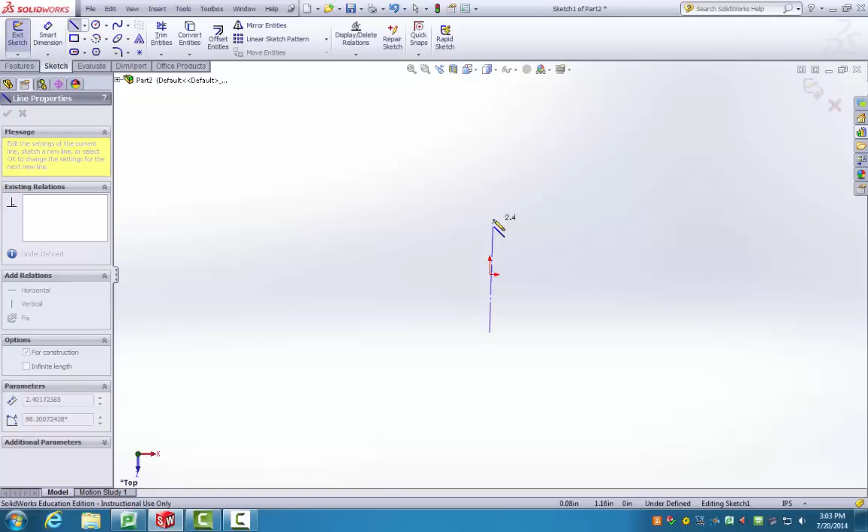To create a construction line, if you remember from chapter 4, drop down, click center line, and we're just going to go like that. Because I don't particularly like these floating blue points, I'm going to click the line and click infinite length, so it goes really big, and that way it's still black with this coincident relation with the origin.

So next we're going to go to Tools, then Sketch Tools, and you can see there's a ton of stuff in here, but we're looking for Dynamic Mirror, and we select this as our mirror line. Next thing we do is basically just make the shape of the base.

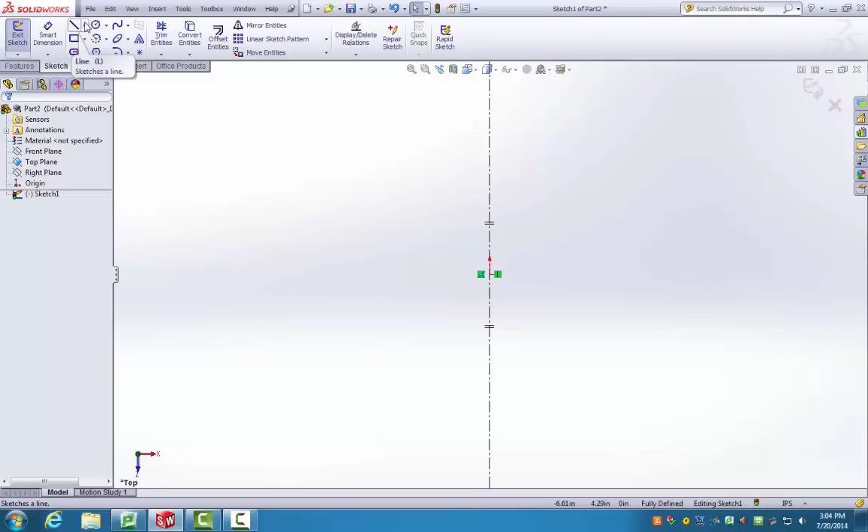I'm going to use my line and draw, and you can see that this dynamic mirror tool, as I go, it's drawing on the other side the exact same thing I'm doing. So next we need a tangent arc, so I'm just going to slide back and pop out, which is that shortcut I showed you before.

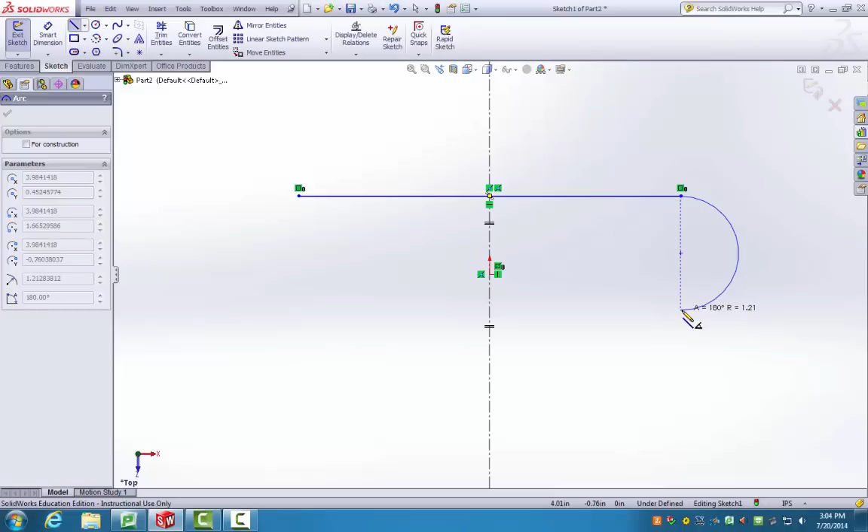Then come right back, go back to the select tool, select a circle, go back to the select tool, and now all we have to do is start dimensioning it.

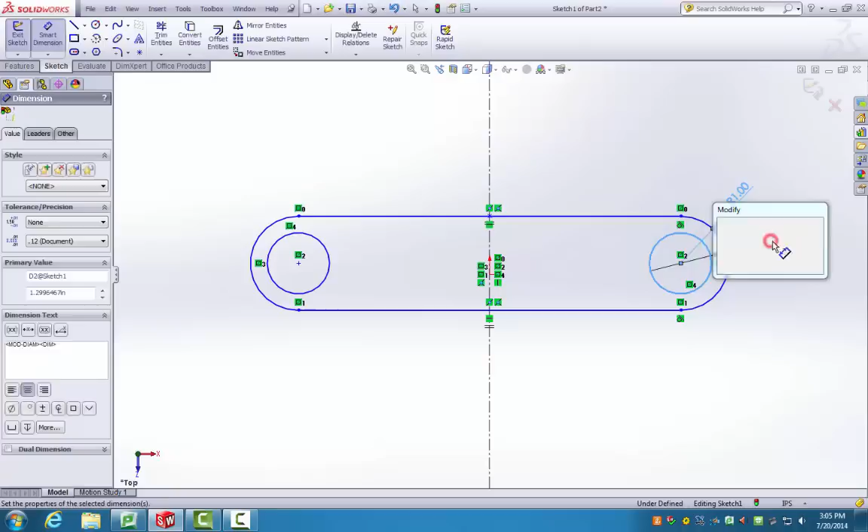So this radius is 1 inch, this diameter is 0.5 inches, the center to center distance between these two circles is 5 inches, and the last thing I'm going to do is, as you can see, the only thing it can do is move vertically. So I'm going to take the center point of this circle and the origin and make them horizontal with each other, and that's a fully defined sketch.

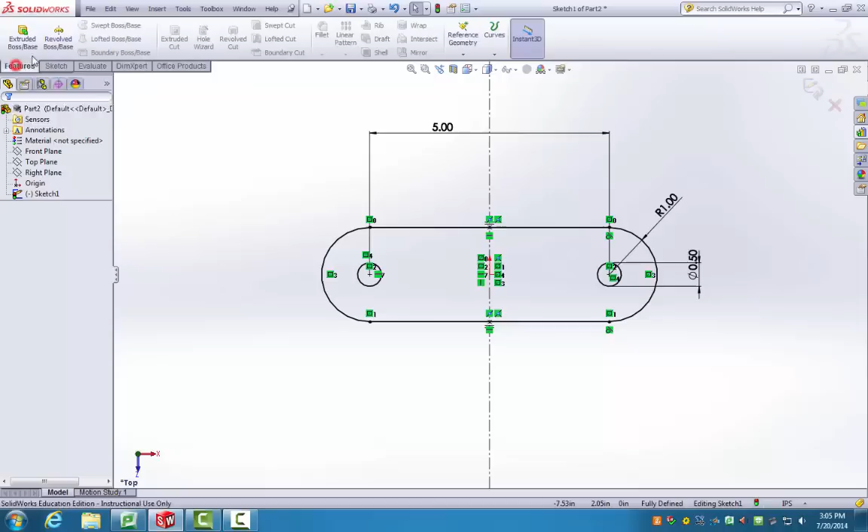Now we can extrude this up 0.5 inches and get to work on the next feature.

The next feature is going to be from the front plane, so I'm going to start a new sketch in the front plane, and it's basically just going to be a circle. Now the book actually does an arc and a line, but I figure it's a little bit quicker just to draw a circle, but maybe that's just my preference.

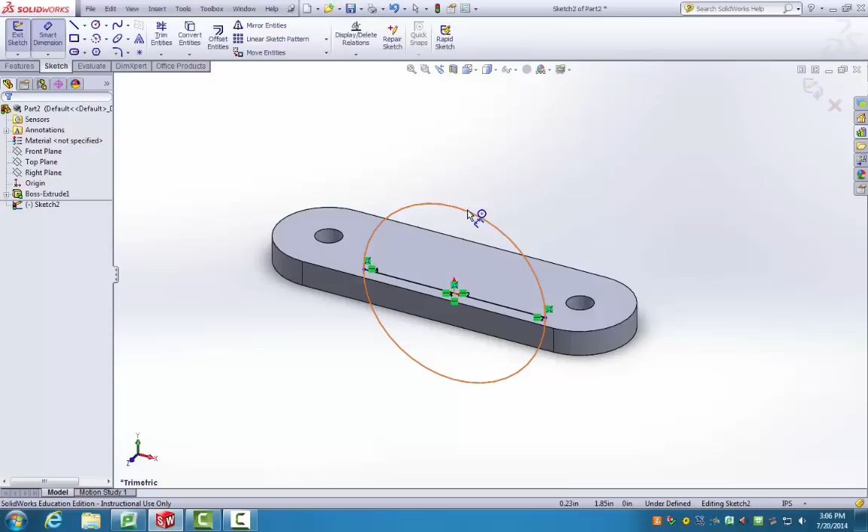For those of you following along, we're at about page 757, so we skipped pretty far ahead pretty quickly. But the radius of this is going to be 1.75 because this is a diameter, so I'm just going to multiply it by 2, times 2. You can see that you can put a little bit of math in there and it'll calculate it for you.

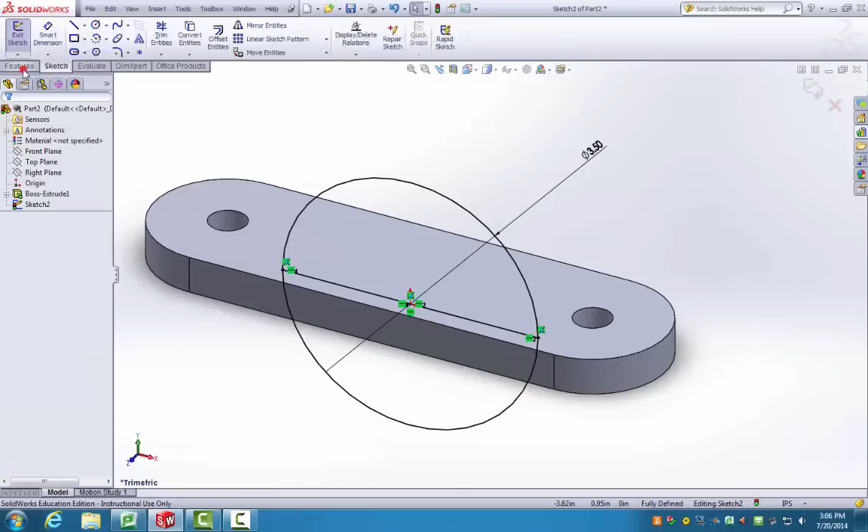Next up, what we're going to do is extrude the top half of that, and we're going to do a mid-plane extrusion, and that's going to be 2.5 inches.

And moving right along, we need to make an extruded cut. Next up, we're going to draw a rectangle and just dimension that 1 inch, 2 inches, and sometimes I want to select the origin right here, but it's not letting me. It's wanting to go to this line.

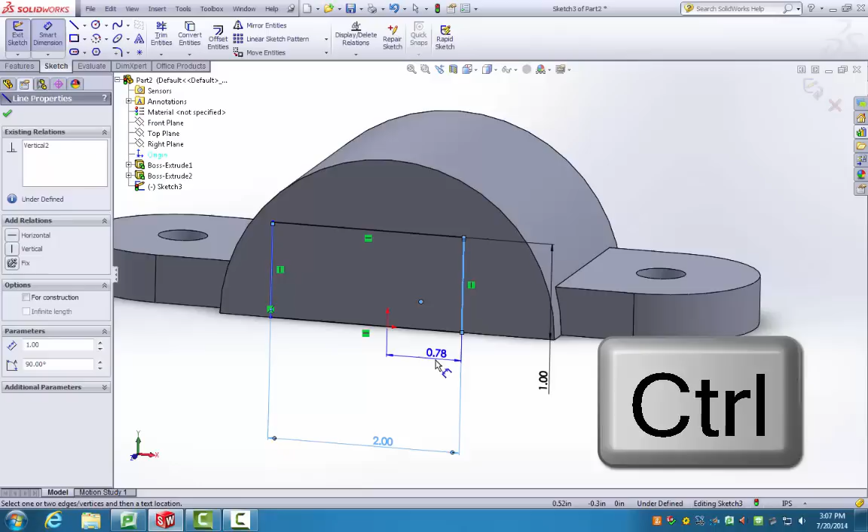So what I'm going to do is click this drop-down feature menu, select the origin in there, hold Control, and then I can select the line. Okay, so that's a little trick. Sometimes if you want to grab something and you can't, but it's a feature on the feature level, you can just open up this fly-out feature menu.

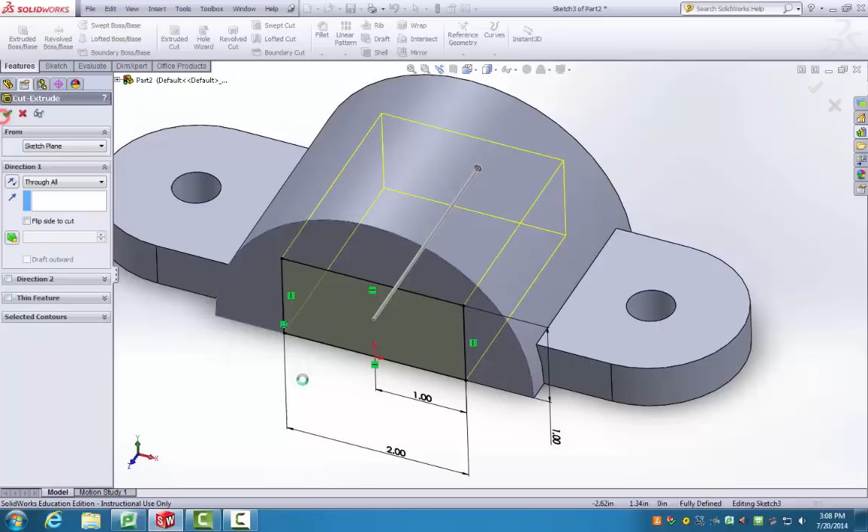All right, that's fully constrained. We're going to extrude cut this, and I'm going to go through all. Now again, the book does things a little bit differently, but follow along. Either strategy will end up with the same part in the end.

Next up we have a hole, so I'm just going to do hole wizard, and we're going to add the position right here, and it's going to be right on the origin. That's why we made that origin centered in the first place.

So it's going to be a straight hole. Go to the drop down, 1/4 inch, through all, and there we go.

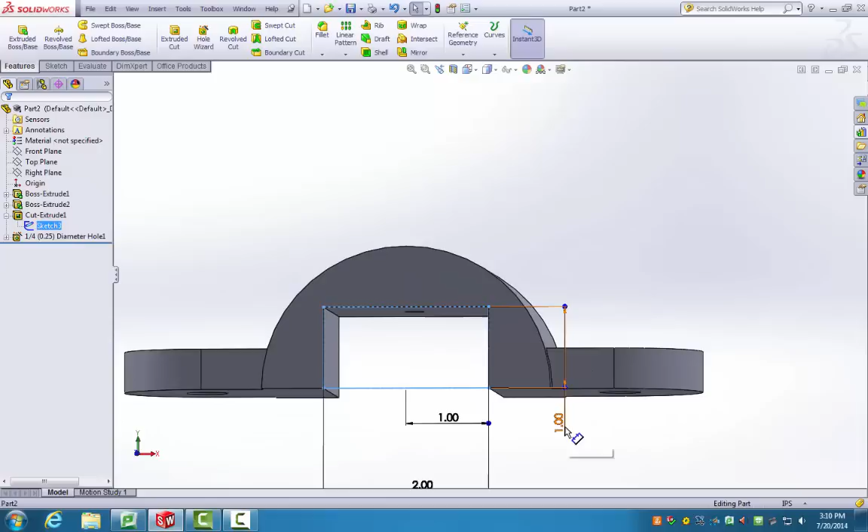Very nice. So the book has you change this to 0.75 and then change it back. We've already done changes like that before, so that's not particularly useful. But then what the book does is it wants to show you that if we have a design change where we need to make, instead of this being a horizontal cut, we need to make it a cylindrical cut.

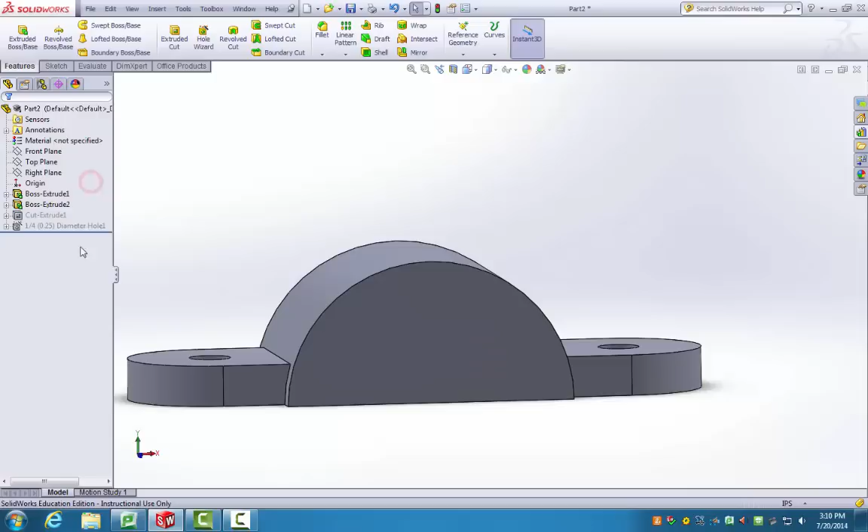So it has us suppress it, and we can see it also suppressed the 1/4 inch diameter hole. Now we don't want that suppressed. So if we unsuppress it, we can see the reason for this is they're linked. This original sketch that the hole was on was off of this plane, off the surface.

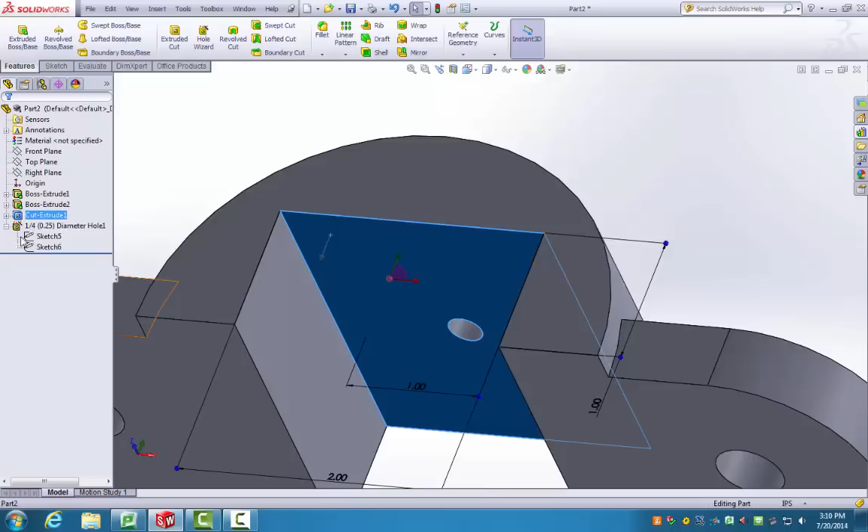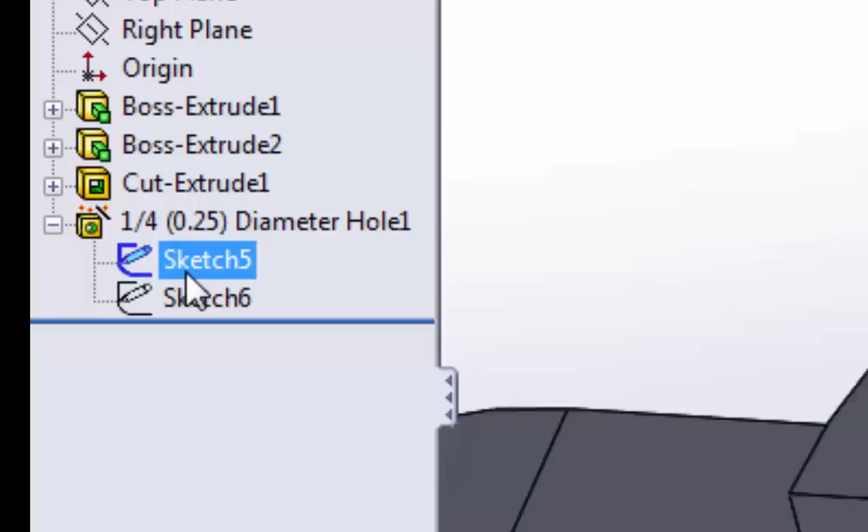So if we didn't cut it, this surface wouldn't exist, and we would have nothing to sketch the hole on. So what we have to do is change the plane we started and sketch the hole position. If we open up the hole from the feature menu, we can see these two sketches: one determines the profile of the hole, and the other is the position. If we look at sketch 5, it's just that one point. So if we right-click sketch 5, we can edit the sketch and add different positions or move it around, or we can edit the sketch plane.

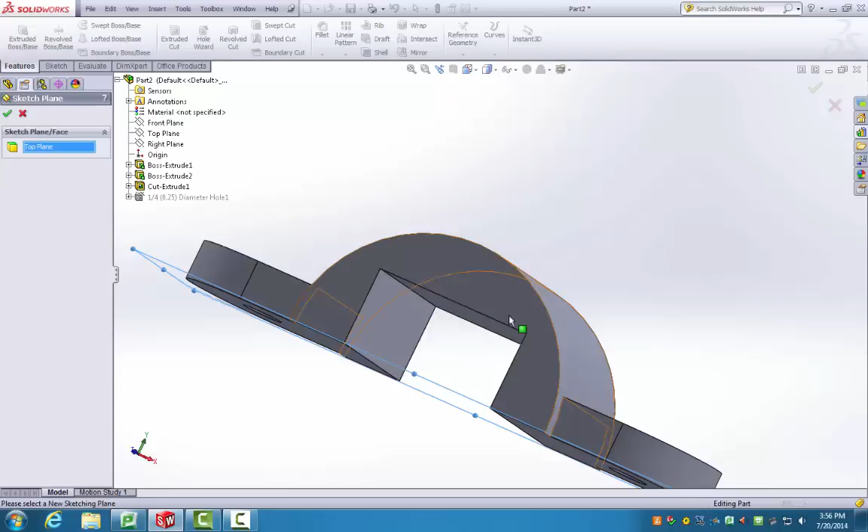So what we're going to do is edit the sketch plane, and as you can see, we selected this face. Rather, now we're going to select the top plane. It's still the same plane, just offset, but because we did a through-all hole anyway, it'll still go through the entire part. So we select OK. The hole doesn't look different, but now if we suppress this, we can very easily see the hole is still there.

So now let's get onto the last part, which is this circular cut. From the front plane, we're going to sketch a circle of diameter 2.5 inches, and we're going to extruded cut that. Now the book has you just do a mid-plane extruded cut, 2.5 or greater.

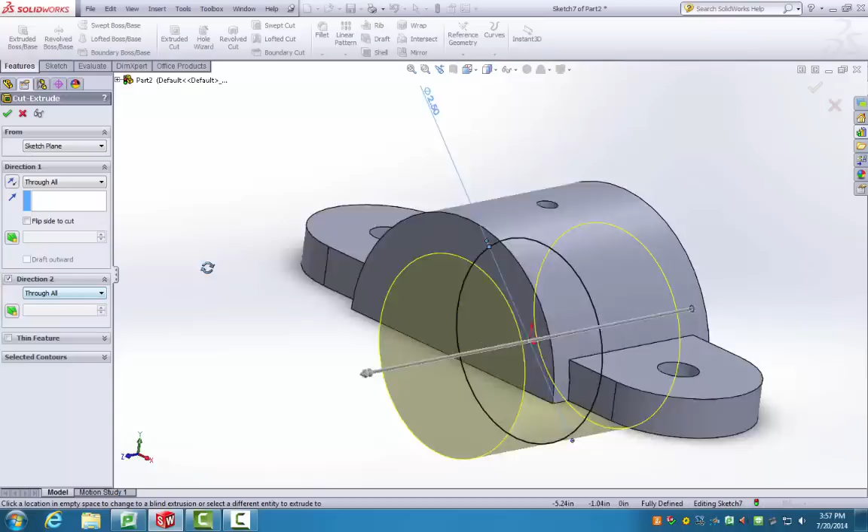That's not really the best way to do it. The best way is actually to do through all. You intend for this cut to go through the entire piece of the part, so you should do through all. Now, you'll notice that because we started in a middle plane, if we select through all, it'll only cut through half of it. That's why if we check this Direction 2 and do through all, we can do through all in both directions.

And that just preserves the design intent of the part just a little bit better. And we'll just leave this suppressed for now in case the design changes again, and we're all set. Now the book has us change the names of the features.

And now that we've done that, I'm going to save this. You want to save this in your Chapter 7 folder, wherever you're saving your parts. I'm just going to save it to the desktop, and I'm going to call this U bracket. So I'm going to hit save.

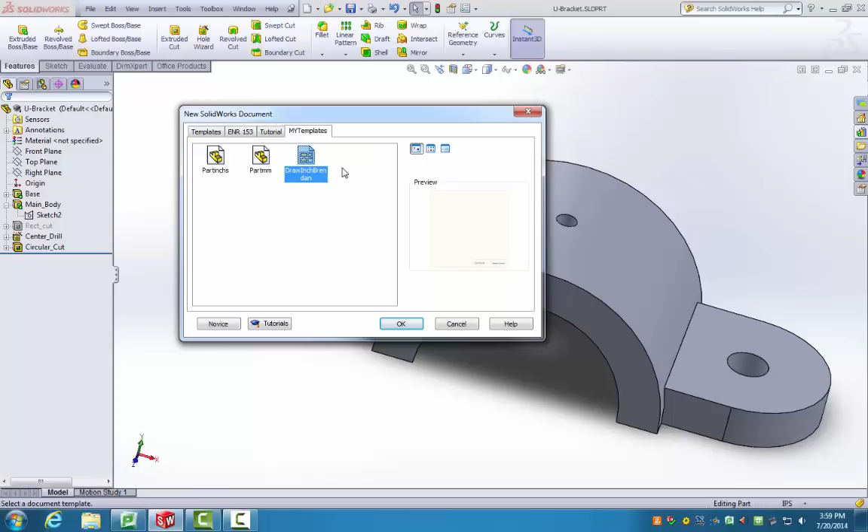And now what we can do is open up a drawing file. Hopefully by this time you've gone through the templates a bit, and you've created your own templates, which will save you time in this next part. So we're going to go to File, New, and as you can see in my templates, I'm just going to select Drawing Inches and hit OK. Having gone through the templates process, it's going to save you a lot of the headache.

For those of you following in the book, we're around page 771. If you've done a template, it's going to save you a lot of the work, basically pages 771 through 775. And we can start pretty much on 776, where we're right away entering the views.

So what we're going to do is X out of model view, which it automatically wants to do. We're going to go to View Layout, and we're going to do Standard 3 View. As you can see, we have the U bracket still open, so it automatically assumes we want to do a drawing of this. If you had closed the U bracket, you can simply go to Browse, find wherever you saved it, and select it from there.

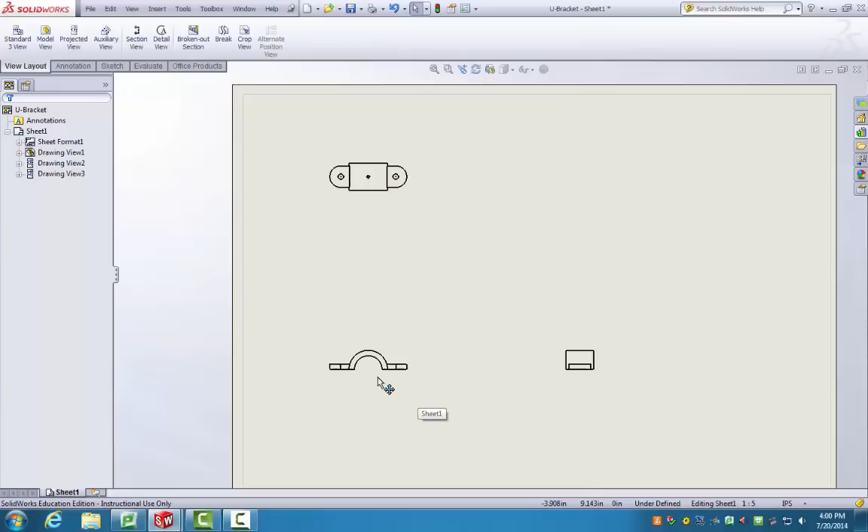And now you can see it imported the drawings. What we can do is select these, and we can change the orientation of the view, change configurations, change the display state so that it includes hidden lines. This is the one we want to select.

Now again, if I choose this front view and modify it, it automatically changes these subsequent views, because that's the nature of an orthographic drawing. They should all be in the same properties.

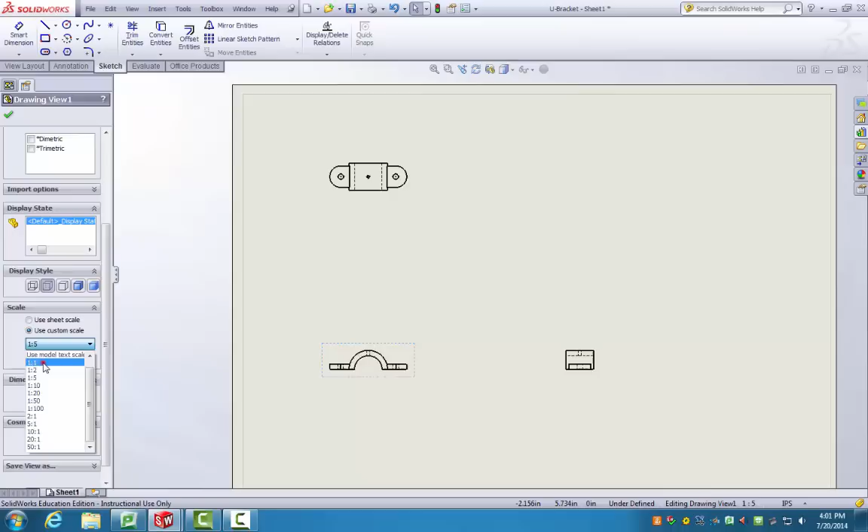We can change the sheet scale and use a custom scale so maybe it's 1:1, well, maybe not 1:1, maybe 1:2, make it a little bit bigger. We can do projected or true dimensions and so on and so forth. And if we hit OK, now we're pretty happy. We can move these and drag them around by just selecting them.

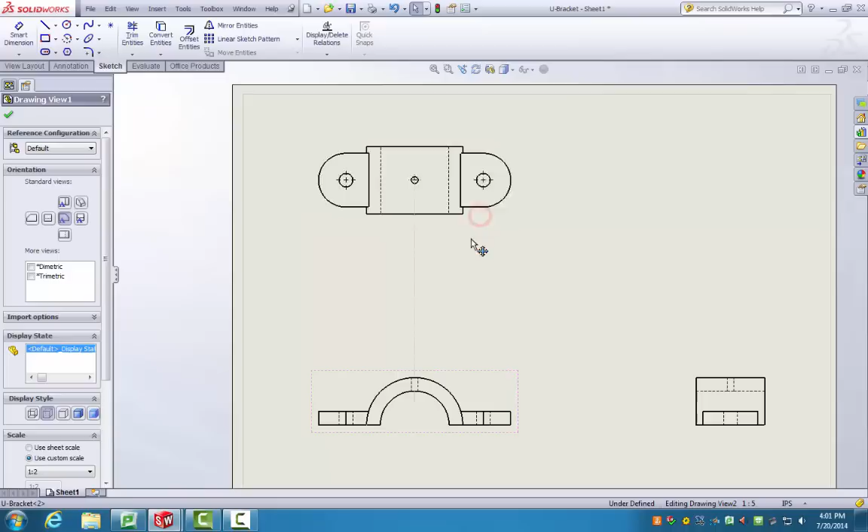You can see that these are limited in the plane. They're projected so that wherever this moves, the top one has to move, but you can change how far they are projected. And what we're going to do now is this is our standard 3 view.

So we're going to hit OK, and now we're going to add a sheet. We see the format that comes from our template, and then we see the 3 views that it brought in. In these views, we see the U bracket and all its features, and we can actually select them by feature. So you can see how everything you've done in SOLIDWORKS, it remembers, and you can access it nearly at every stage of the design process.

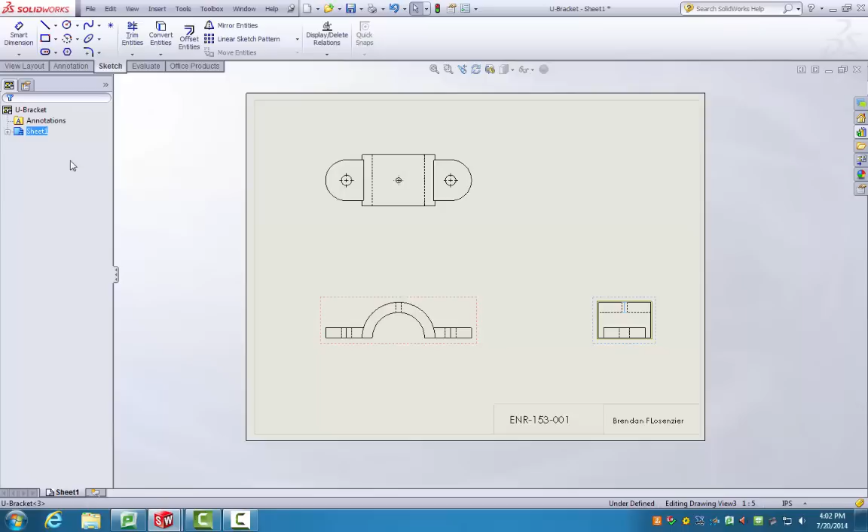And this time, just like I mentioned before, if you've gone through the template, it saves you from having to define scales, define sheet sizes, and also go through document properties and change lines, because you would have already done that once when you created your template, so you wouldn't have to do it again.

But for now, what we're going to do is click Model View. So again, we're going to View Layout. Now if you look up top, you see the tabs are a little bit different. You still have a Sketch tab. You still have an Annotations tab, although oftentimes annotations are for dimensioning or for just putting notes.

You don't see the Smart Dimension here. You see the Smart Dimension in Sketch, but the Annotation Smart Dimension and the Sketch Smart Dimension are a little bit different. So now we're going to go to View Layout.

This is where you can import new views and different types of views in your part. We've already done the 3 view. We're going to do Model View next. Again, we want the U bracket. So now we can see, that's our front view.

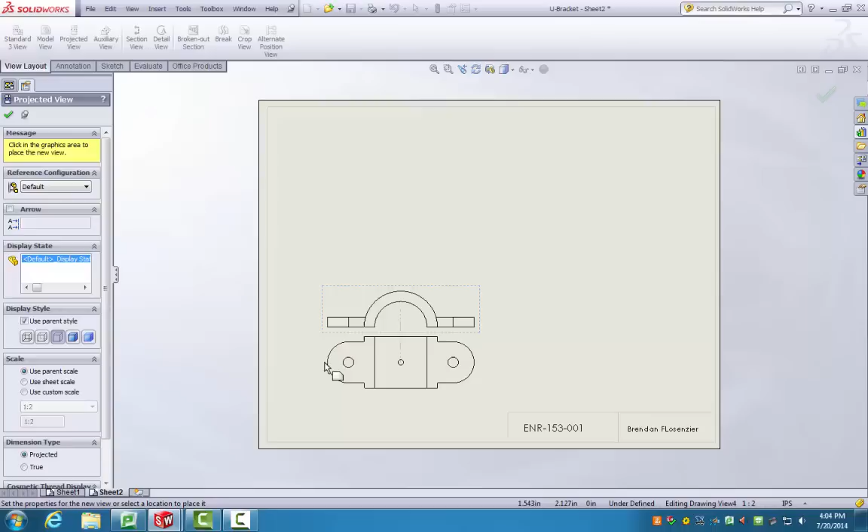Now you can see that's our front view, and it automatically wants us to do a projected view. After we click that, it automatically assumes that, well, maybe we don't want to do a 3 view, but we do want to do projected views.

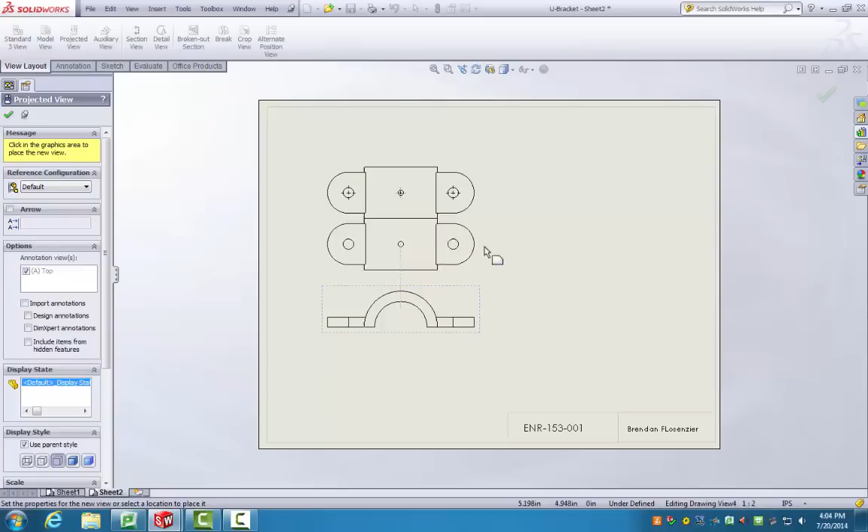So if we click up here and go off diagonal, you can see isometric view. We're going to click this isometric view and hit OK. And now I can move the isometric view. It is not tied, even though it is a projected view, it is not tied to this front view.

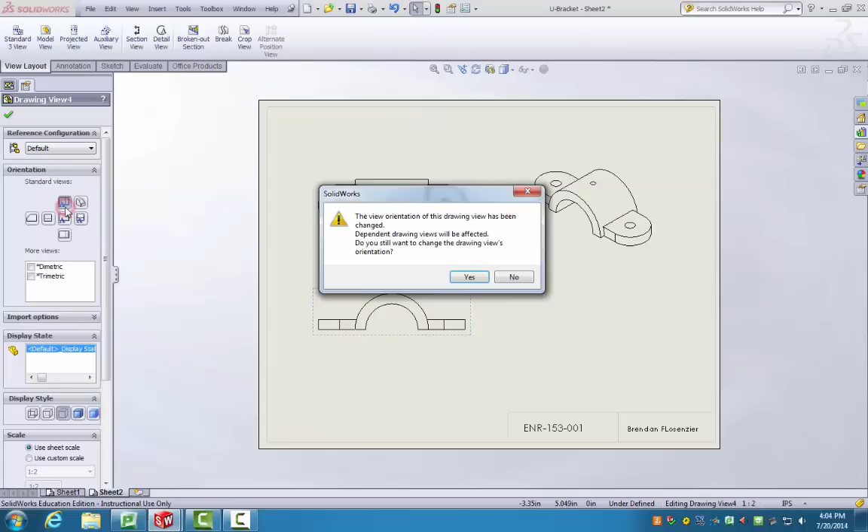These, however, are still tied to each other. And what we can do, if you need to change this, if I change the view to a top view, it'll change all these other projected views, and then it'll change back, and it'll warn me because it's going to want to change all these.

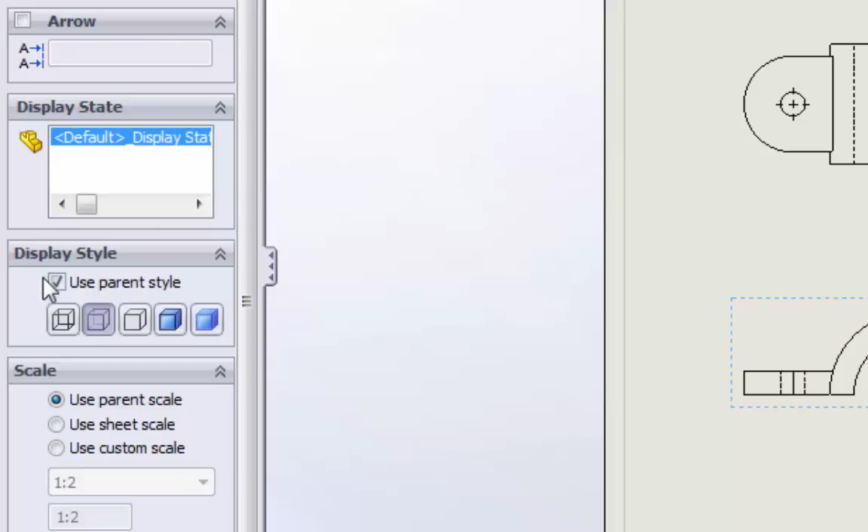And we want hidden lines visible, except this one, we don't want hidden lines visible. So one way we can do that is, you see this display style says use parent. That's because this view is derived from the front view. So if we unselect this and simply do hidden lines removed, now we get a little bit more of an attractive drawing. We generally don't like hidden lines in isometric views except in rare circumstances.

That's pretty much the basics of the drawing. Later on in the course, you'll learn how to import dimensions and add notes, and possibly do more advanced views like auxiliary, section, or detail views.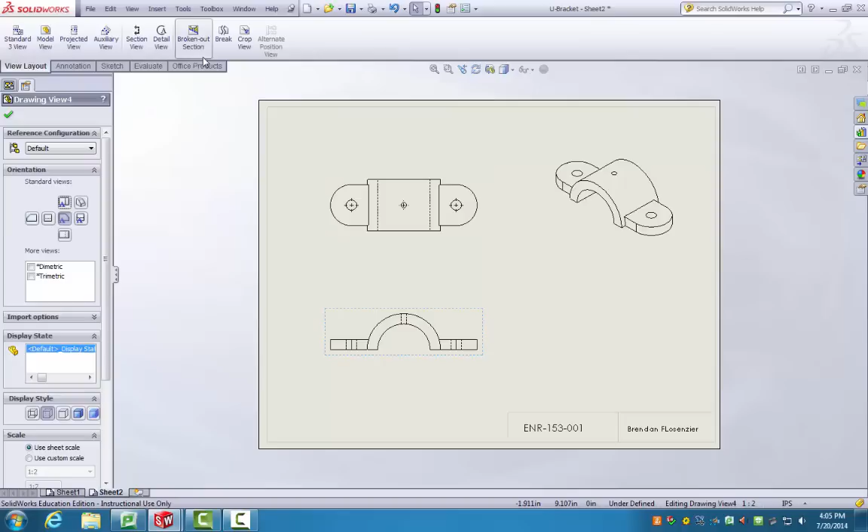So what we're going to do is just save this. I'm going to save it right next to it, and now it's a SLDDRW, SOLIDWORKS drawing, instead of a SOLIDWORKS part. And what you'll be able to see is the real power behind this. I'm going to minimize this.

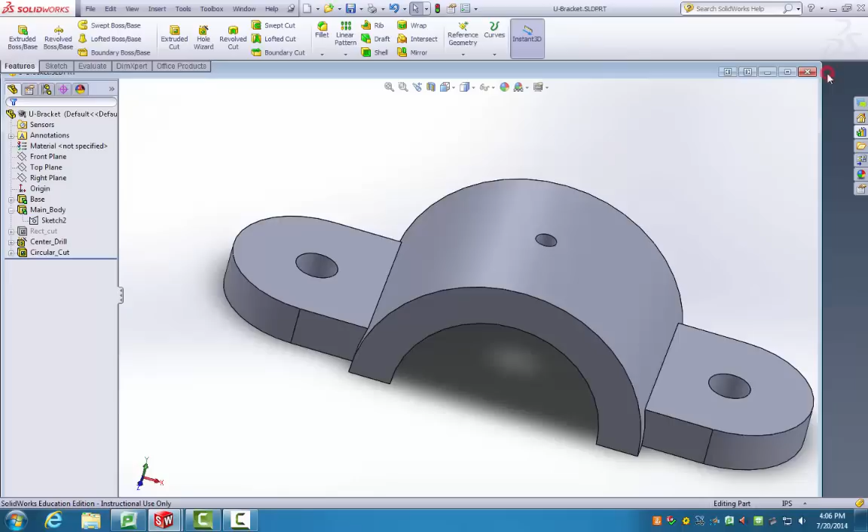I'm going to change this. I'm going to say, well, you know what, we wanted the circular cut, but I changed my mind. I want to suppress it, and I want to unsuppress that rectangular cut. And now I'm going to save this.

You don't have to do this, but I'm going to show you what happens to our drawing. You can see, boom, it's a rectangular cut. This drawing file is linked to the part file, so any changes in the part are automatically updated in this drawing, and any dimensions would change as well.

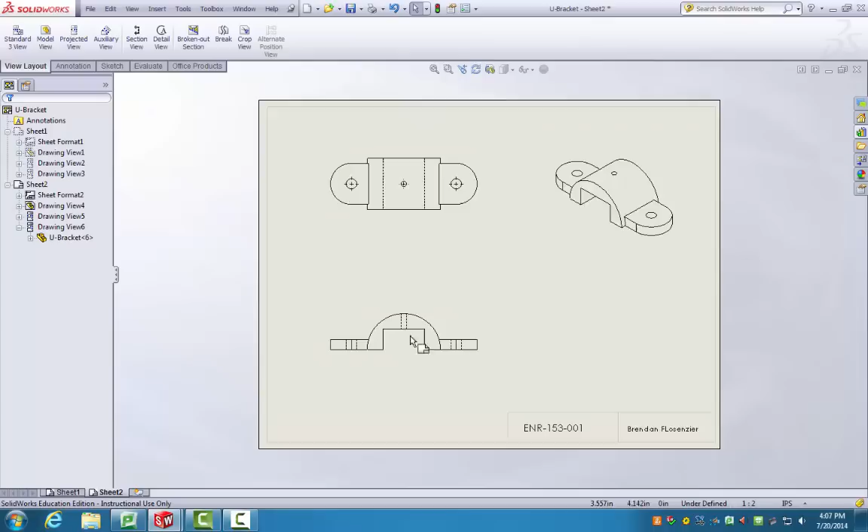So it's a pretty powerful tool. But that's all for Chapter 7. Chapter 8 will go into a little bit more detail about creating dimensions and annotations and other views for this drawing.